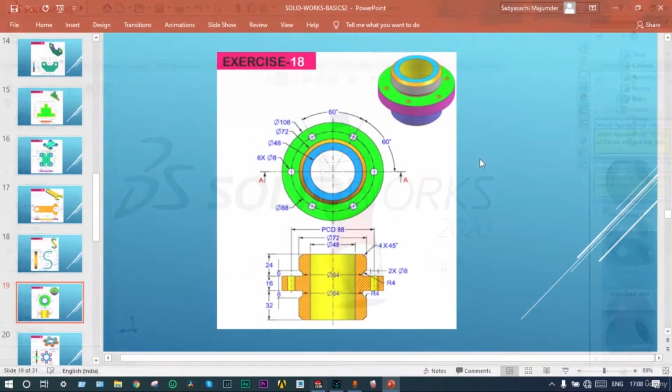Hello friends, today I'll show modeling of a simple mechanical component using SolidWorks. Actually, this is for the beginner's practice. This is exercise number 18.

First of all, we have to draw the cross section. If we take it from this side, the cross section should be drawn. After making the cross section, it has to be revolved or rotated by 360 degrees. Okay, let's get started. Starting from parts.

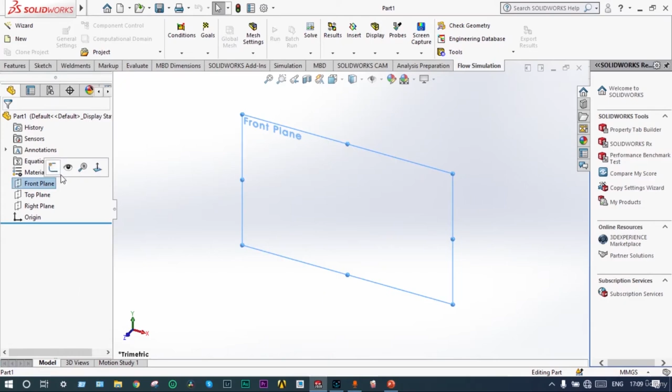We start from the front plane, normal to, and draw the center line. This one should be vertical. Done. Now we have to see the drawing and start sketching. So initially, inside we are having a hole of diameter 48 millimeter. Okay, we are drawing it right now.

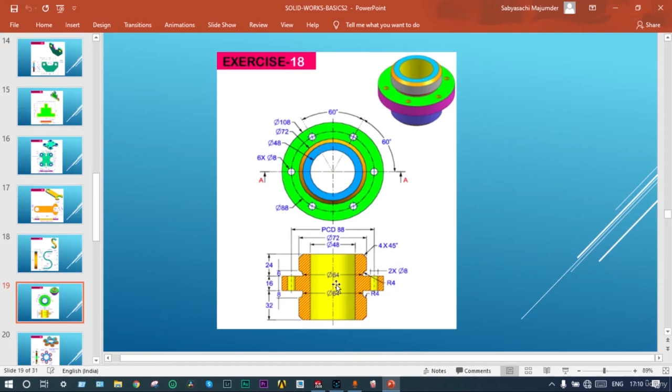You can see this is actually symmetric along the vertical axis, but at the same time the horizontal axis also. So we need not draw both the parts. We have to draw only one part, 1/4 of this one, then we can make a mirror, then finally we can rotate. We have to make this part only. Okay, so we have to draw both the axes, horizontal and vertical.

Another center line is needed. Let's make this one horizontal. Done. Starting from line, straight line. As inside we are having a hole, we'll start with a little bit of gap.

This is the sketch. Now we can provide smart dimension to it. Let's provide smart dimension. This part will be 8 millimeter only. This one is going to come later on. This part will be 24 minus 6, 18 millimeter.

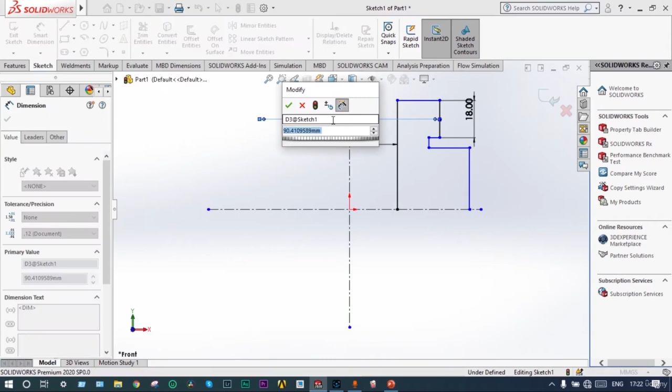And this diameter will be 48 millimeter. This one will be 72 millimeter. And the maximum one equal to 108 millimeter. Let's see other parts. This part will be equal to 8 millimeter. And the middle part will be very small, it will come down to 6 millimeter. This one will be 6 millimeter.

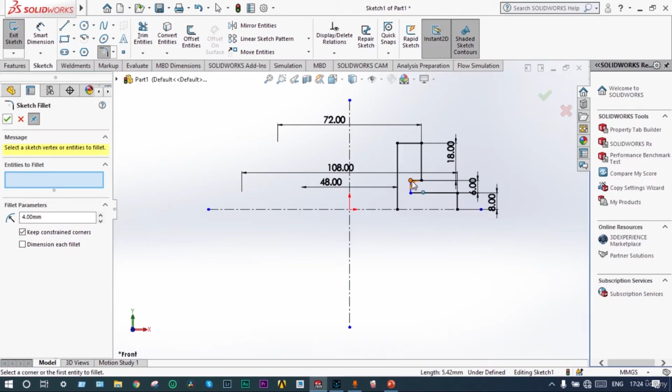Now here we have to provide one fillet or arc of radius 4 millimeter, and here a chamfer is required. The chamfer we can make after making it solid. Here one arc of radius 4 millimeter is required. We can make it right now. Four millimeter arc radius is made.

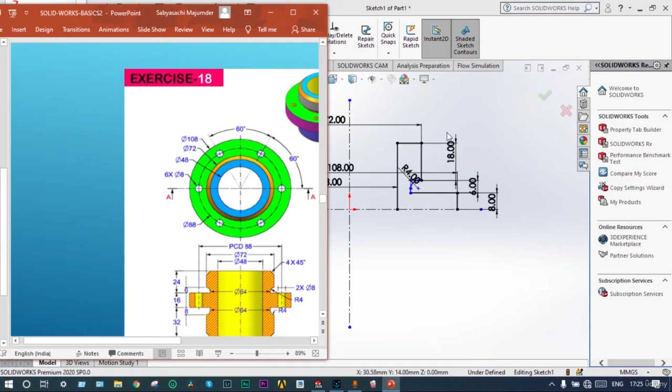So the distance from here to here is 24 millimeter. And then it is coming down 8 millimeter. This total is 16. We have made half of that. Next, we have to make a mirror of this with respect to the x-axis, right? Then finally we'll revolve with respect to the y-axis. Okay, let's make a mirror of that.

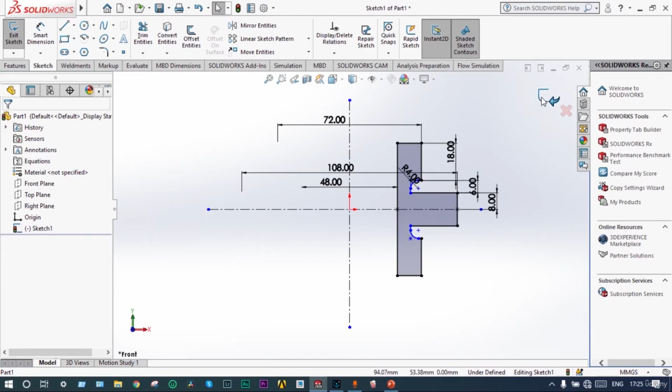So mirror entities, select the object to be mirrored with respect to the line, x-axis. So mirroring is done. Now this part we have to revolve with respect to the central axis. Okay, so exit from the sketch, select the sketch again, features, revolve with respect to central axis.

Done. Now here some kind of chamfer is required. You can see the drawing. Chamfer of 4 mm at an angle of 45 degrees is required. So select that one. We need to provide a chamfer of 4 mm at 45 degree angle. Chamfering is done.

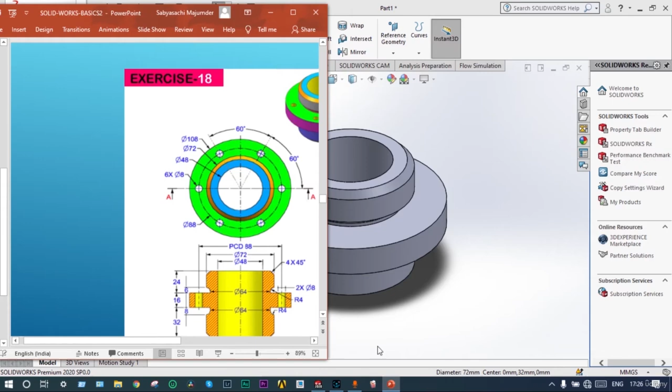Let's see that one to be done at the bottom also. The chamfer is to be done on both sides. So select that side also. Chamfer 4 mm with an angle of 45 degrees. Done. What else is remaining? We have to make some holes.

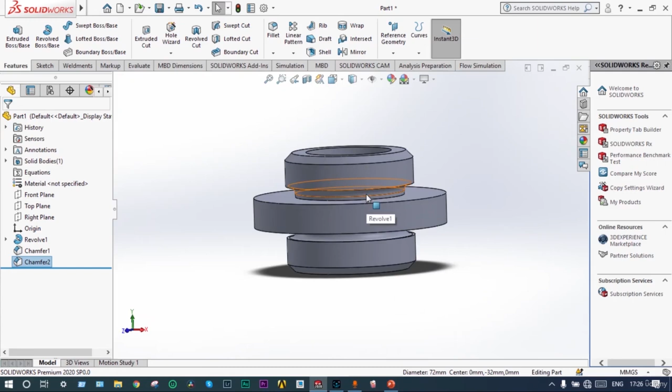You can see here some fillet is also provided. Whatever else is remaining, here some holes are to be made. We can see a total of 6 holes to be made. The hole diameter is equal to 8 mm and PCD of the hole is equal to 88 mm.

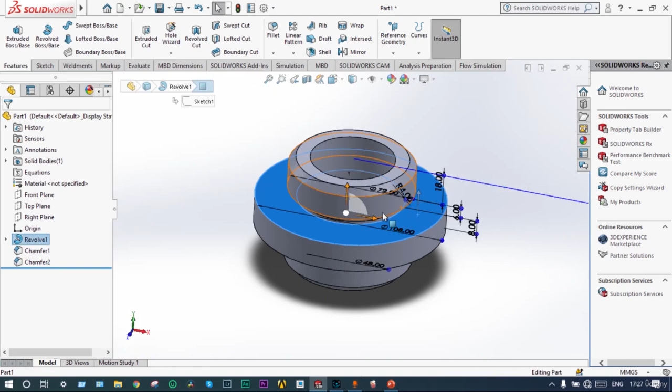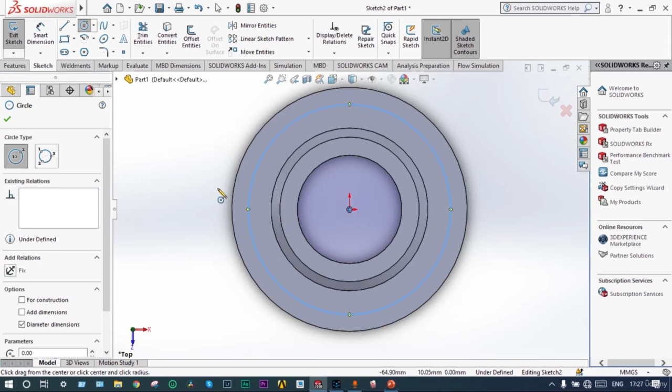So what we'll do is take the top plane again. We take the top plane, normal to, and start drawing a sketch, circle. Let's put smart dimension to that one. Smart dimension to this one will be 88 mm. PCD is 88 mm.

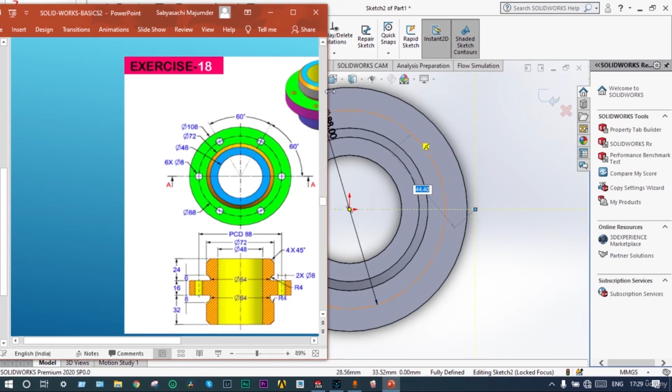This one we can consider as a construction line. Let's provide one center line. Now see the drawing again. We have to draw one hole of diameter 8 mm at this location. Circle. Diameter should be 8 mm, so smart dimension, 8 mm.

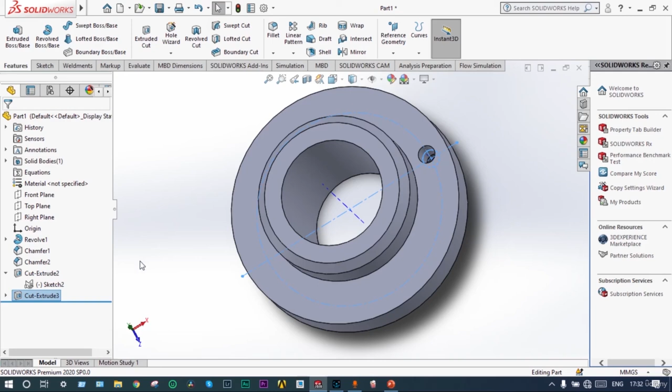Select the sketch, features, extrude cut, and that will cut through all, both sides. You see the cut is ready. Now this hole is to be made in a circular pattern. Select circular pattern. Extruded cut feature is already selected. Extrude cut with respect to central axis. Equal spacing, and the number should be equal to 6. It is done.

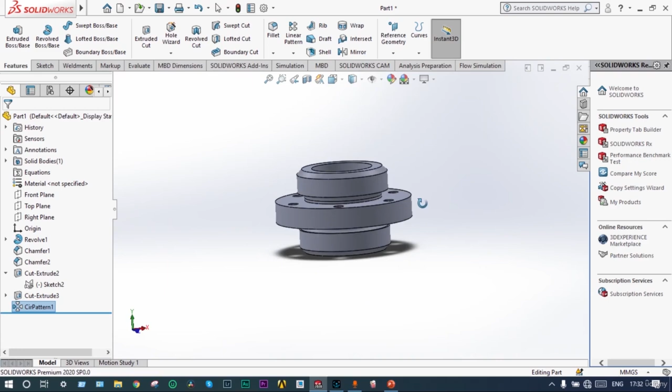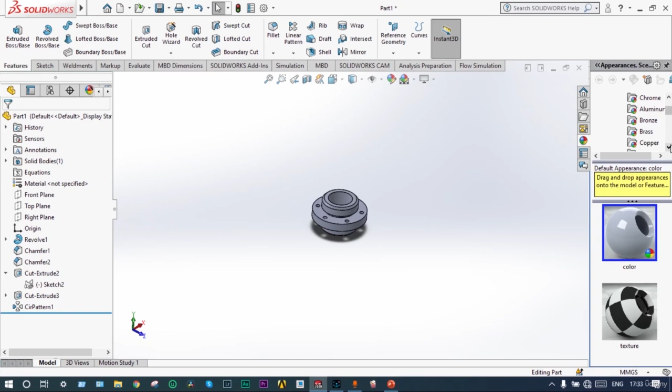So the model is ready. We can make the axis hidden again. Everything is done. Okay, our model is complete. Now we can color it a little bit and provide a metallic color. Appearance, metals. Let's provide the metallic color. This one as copper. Polished copper we are providing.

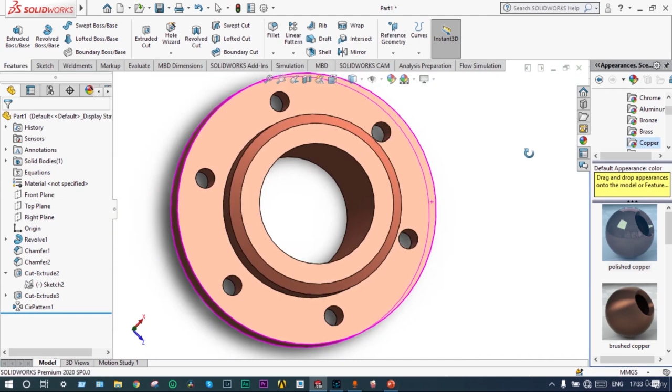This is the object. Now for better appearance, we can make the background a little bit white, plain white. This is our model. Okay, this is a very simple mechanical model known as a flange. This is all about today's exercise.